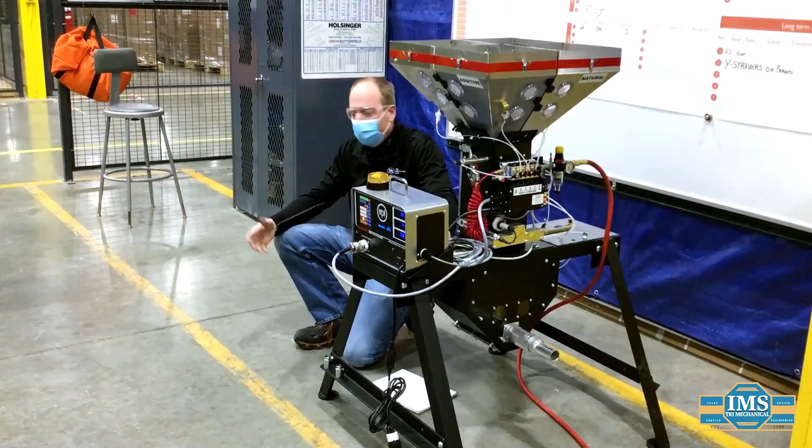Hi, my name's Rod J.R. Duff, and I am the Executive Director for Business Development for the IMS Tri-Mechanical Companies. I started as an inside sales rep in 1989 with the ambition to become a full-service plastics provider. Our company has a full design and engineering department, a full aftermarket services team, and a very energetic team of inside and outside sales professionals. I am proud to say that each of these distinct and separate departments complement each other and are managed by some of the best individuals I have ever met.

Hi, my name is Rob Williams, and I am one of the managers here at IMS Tri-Mechanical Companies. Hello, my name is Lawrence Gooding, Inside Sales Specialist for IMS Tri-Mechanical, with over 10 years of experience in the plastics extrusion industry. My name's Barbara Rodardi, and I'm an account manager with IMS Tri-Mechanical. Hi, I'm Chuck Bueller, and I'm a regional sales manager for IMS Tri-Mechanical Companies. Hi, my name is Bob McHouston, and I'm the Field and Operations Manager for IMS Tri-Mechanical.

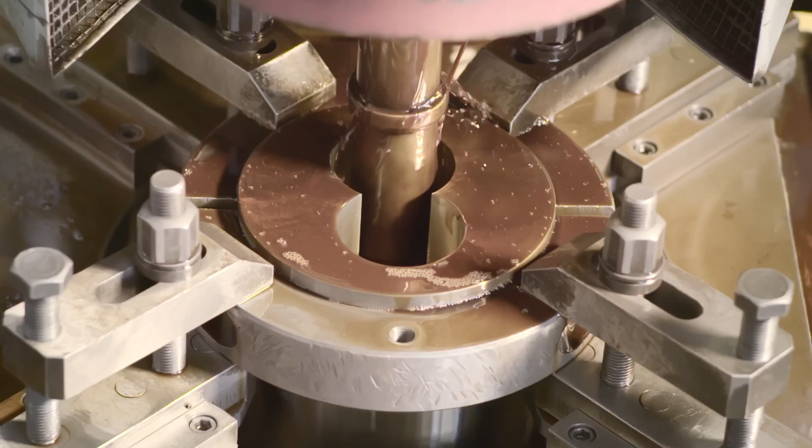Today, I'm here to talk about Bausano extrusion systems and the upcoming Bausano Open Day event. Bausano is synonymous with innovation. This is why IMS Tri-Mechanical partners with them. We offer our customers the opportunity of transforming their companies into smart factories where productivity increases and working conditions improve.

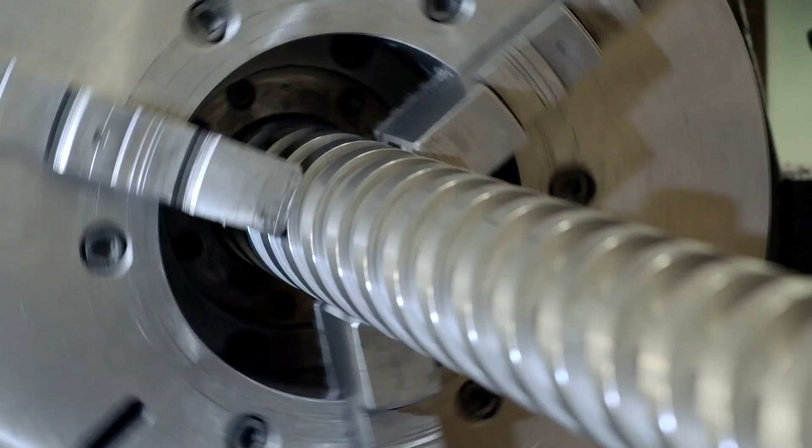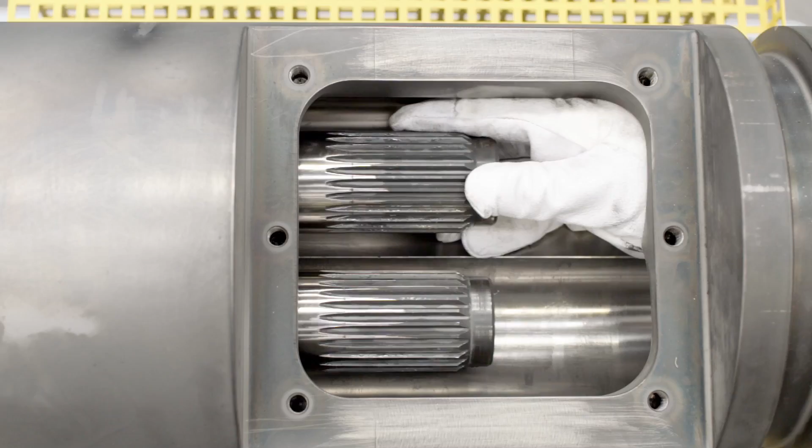Unlike other extruder manufacturers, Bausano does everything in-house. I mean everything, from component drawing and manufacturing to line assembly. Every step is managed internally by their highly skilled staff. Hi, we're here at one of the leading PVC compounders, certainly in North America. We just want to share their thoughts on Bausano extrusion systems.

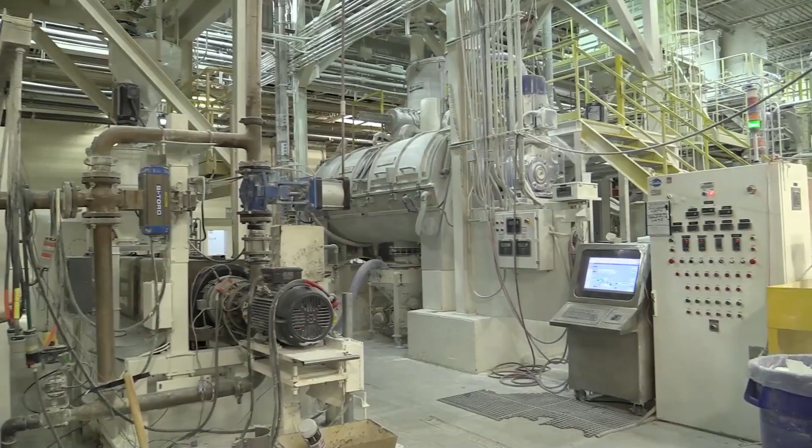Hi, my name is Nick Lynch. I'm the president and CEO of Roscom Incorporated. So in the mid to late 80s, Roscom was looking for a twin screw manufacturer so we could buy equipment from. And we went to Italy and we met with Bausano Group. Since then, we've produced over 1 billion pounds of material utilizing the Bausano extruders here at the Roscom facility. Our goal was to get to a machine that would run 1,500 pounds an hour. Bausano, with their 154 machine, has proven that we run 3,000 pounds an hour.

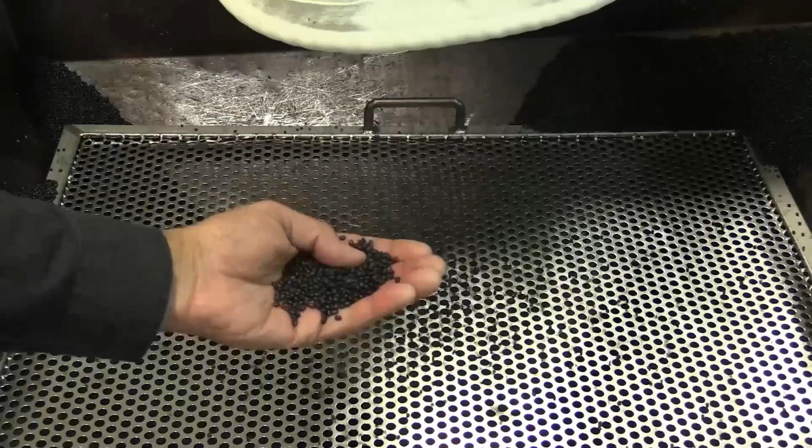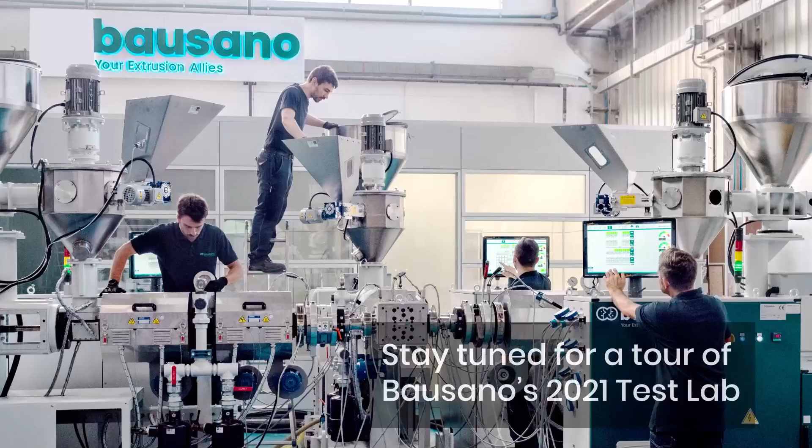So before we could actually buy a piece of equipment, we had to confirm that the material itself was going to work in our customers' locations. Bausano had a testing laboratory, a full production testing laboratory. So they allowed us to ship material. We shipped it in a dry blend form, 20,000 pounds of 4 different materials. We wanted to verify that the material coming off of those production lines would meet the quality of our customers' products. And they did.

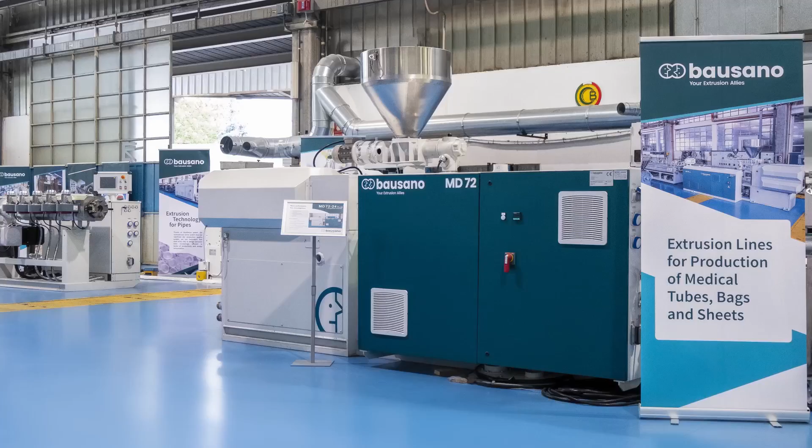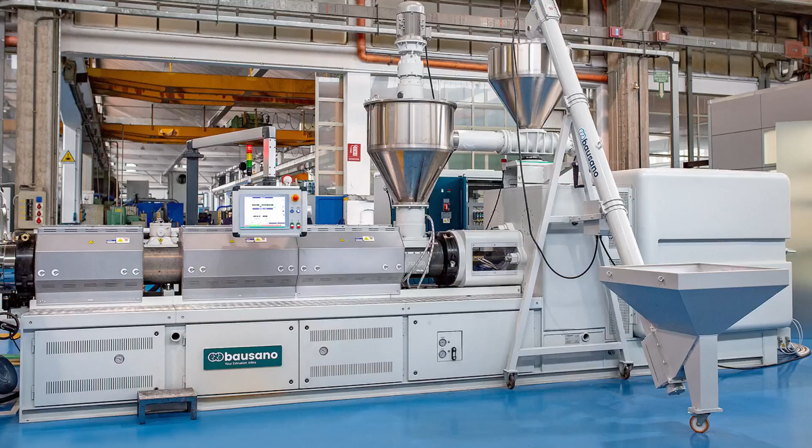As the president and CEO, I've been into so many different companies. And Bausano's was the place, and it's hard to say this and people really believe it, but you could eat off the floor. Bausano showed us this new Ford transmission gearbox, and those gearboxes, instead of going for 2 years, we were running for 5 years, 10 years. The multi-drive system has proven that it actually works. And we need that for the amount of torque that we actually put through the extruder heads to manufacture our pellets, be it flexibles or rigids.

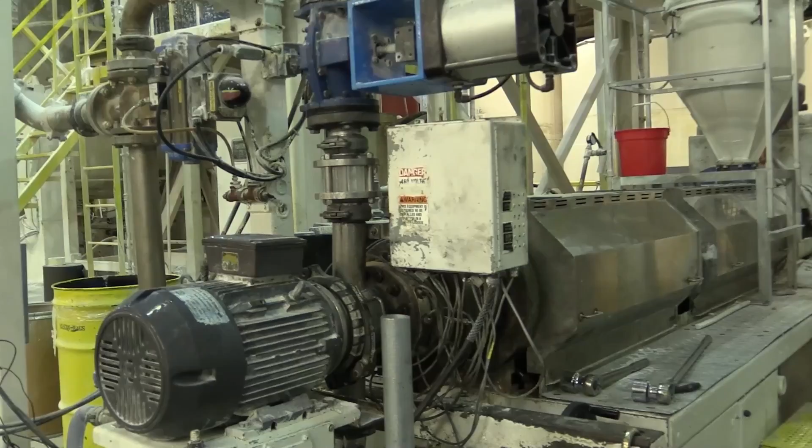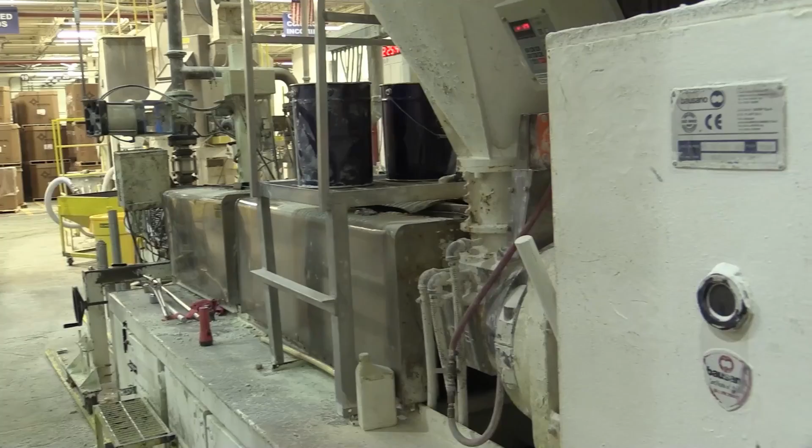I arrived at Roscom in 1996, and pretty much all but one of our 5 Bausano extruders were already in place here at that time. So we've been running them pretty steady since the day before I walked in the door. I actually love the Bausano. Back in, I'm going to say 2001, I did the install of that line. That was the 5th one that we added. We beat the hell out of them. They're bulls. They run. We never really have an issue with them, which is great.

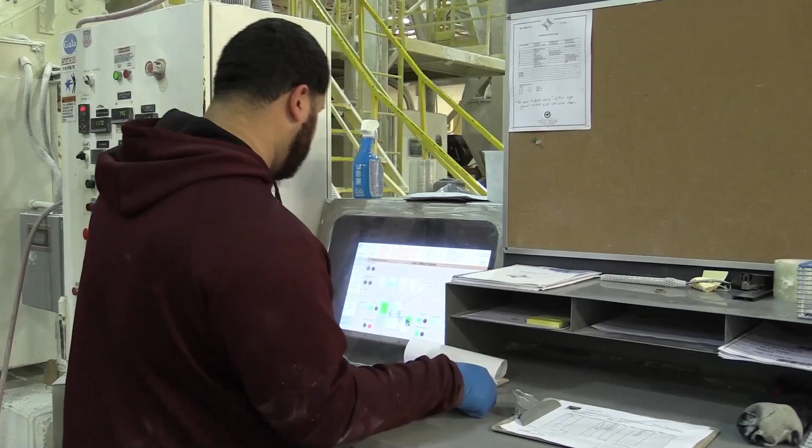As a manufacturer who runs 24 hours, 7 days a week, and we're always in somewhat of a sold-out position, the importance of having spare parts. Bausano manufactures this equipment every single day, so if we needed a transmission or we needed a gearbox, some companies here in the United States, you wait 6 to 9 months before they'll even have a product to ship you.

Bausano has been there for us right from the beginning. They have that type of inventory. Bausano's spare parts and everything, we've never really had a problem. We always go at them with an email and they're back to us in less than 24 hours worth of response. They've never dropped the ball on us at all. They've always been right there with us to work through anything, any questions.

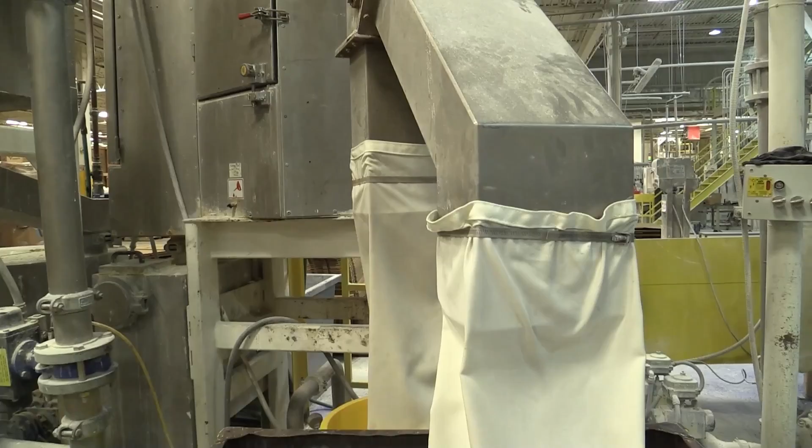Bausano itself, you can adapt various other equipment regardless of the manufacturers that we select that we want to work with. It ties in with the Bausano lines. When I talked about how clean and wonderful that plant was, and you look at all the orders and all the manufacturing, you knew Bausano was here to stay for the long run. And it's proven its point here 40 years later. They're a strong, wonderful company. They've done a great job for us.

I don't know of any other company that I personally have worked with, and I've worked with a lot of companies, I've designed a lot of plants, that the Bausano people and the equipment are state of the art. If I put another production line in from Roscom, I guarantee you it's a Bausano line.

You can go visit any manufacturer in the world, go visit them, go to the Bausano facility itself, and you make your own choices, and I guarantee you'll come back with the same feeling that I did, that you're working with a first-class world manufacturer of equipment. And that's, for me personally, seeing it and seeing other companies, you'll never regret it. It's worth the trip.

I'm not getting paid for this at all. I would never want any money. Bausano is a fantastic company, and I just wanted to spread that to anyone else that wants to listen. And I guarantee you, go visit everyone else, see Bausano, and you'll have them for life, just like Roscom.

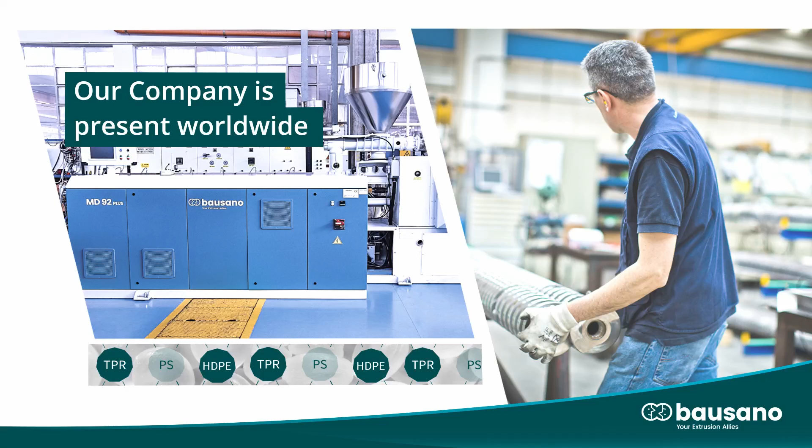And let me tell you something. A structured training program for specialized technicians is underway at the Houston and Oswego partnerships, aimed at guaranteeing qualified and prompt assistance centered around flexibility. But not only. In autumn, at the showrooms of our partners, a twin screw extrusion line will be installed to be seen and tested by any interested customer. Now I will hand over to Gianmarco to go into the details of the line that you will see in operations today.

My name is Gianmarco Palladino, and as previously mentioned by Giorgio, I'm in charge of the southern part of the US, from California up to Florida. Today I will talk about our range of products. The core product is the Twin Screw Counterrotating Extruder, used for many different kinds of applications. For the production of pelletizing and repelletizing lines for different materials, but mostly PVC. For the production of pipes, such as conduit, pressure or sewer pipes, up to medical and agricultural hoses.

In fact, over the past year, we have developed and improved a new generation of die head technology in order to provide a high-speed line where we can reach interesting output. Then, of course, we provide extrusion lines for the production of profiles, such as windows, flooring, and ceiling, even those made in WPC, so wood plastic composite.

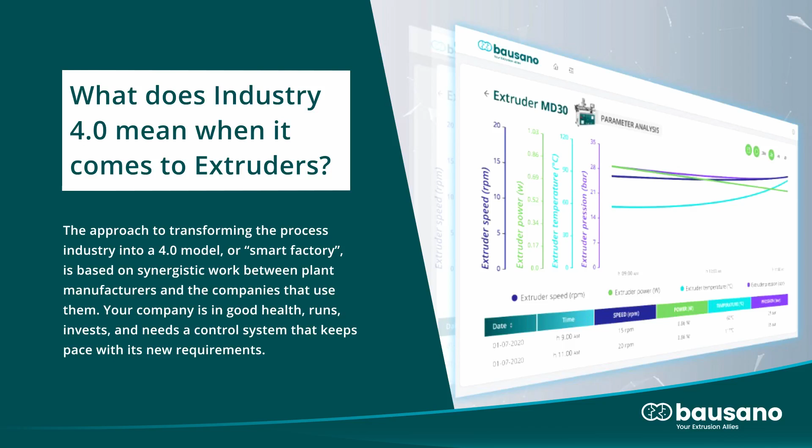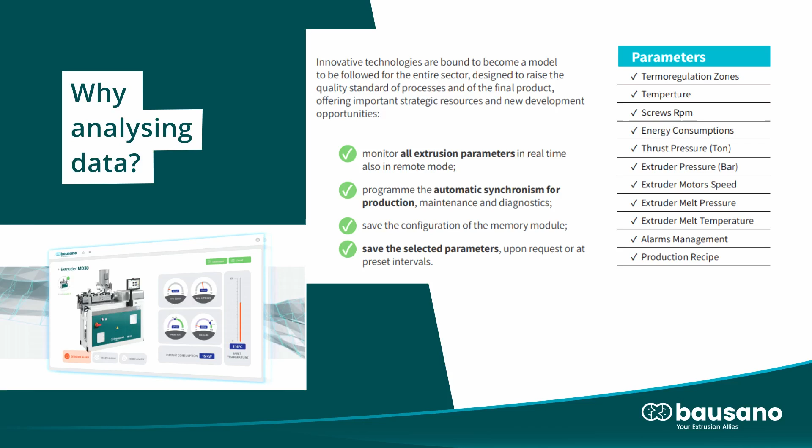So why analyze data? The integration of the IoT system and Bausano extrusion line provides a short time to market production and compatibility with existing plants. It performs continuous and real-time monitoring of production, generates immediate reports and intuitive graphs on production performance, like machinery status and waste, intelligently connects all the machines in the field and integrates them with a company management system, such as ERP or CRM, to automatically govern their startup processes, collect raw data and transform it into ready-to-use information, and have certified and correct data on which to set the analysis of its business and R&D activities.

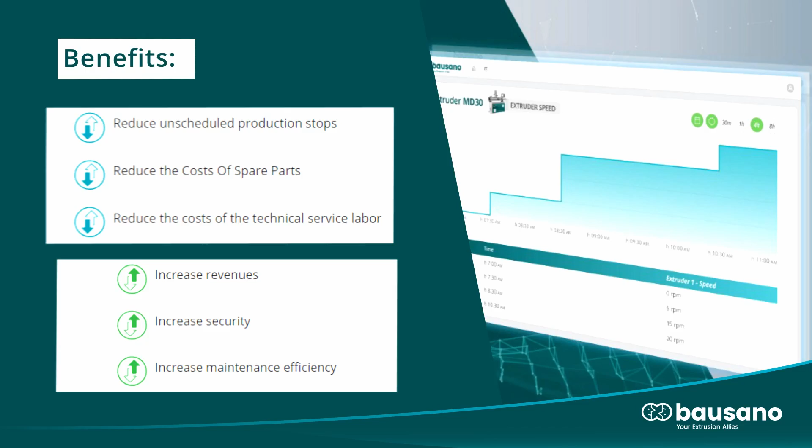This means that in the future, different machines in different places and production locations around the world can be incorporated in one single system. So now I'll hand over to Giorgio, who will explain how our smart energy saving system works. Thank you, Gianmarco.

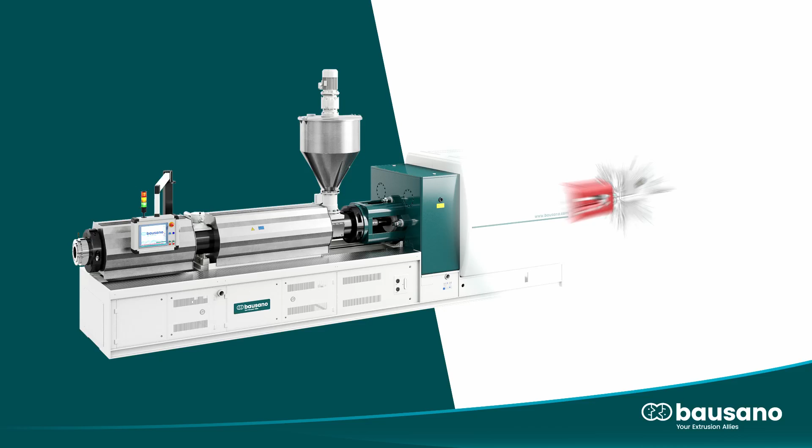Dear ladies and gentlemen, now finally we reach the heart of Bausano technologies. The great hallmark of our twin screw extruders, which was designed in the 80s and since then constantly perfected, is our Multidrive patent. The MD series twin screw extruders are in fact the only ones in the world equipped with this transmission system, which allows for the increase of the power and the resistance of the systems, as well as a reduction in

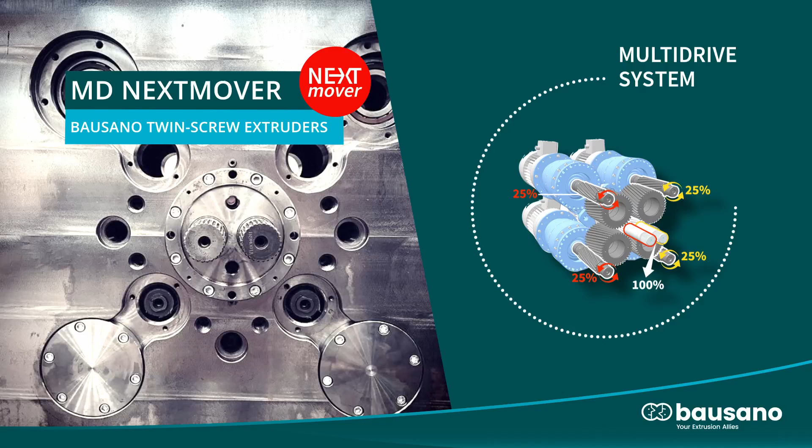energy consumption. In fact, traditional transmission systems, due to their intrinsic nature, have obvious problems of strength and space as the installed power increases. The Bausano multi-drive system, on the other hand, allows the distribution of motion on 4 different points. It increases the life of the shafts and gearbox, increasing the general reliability of the extruder. The system, with 2 intermeshing counter-rotating screws, guarantees great durability and optimal performance for any type of extrusion line.

Last but not least, the system makes it possible to reduce energy consumption with the same performance. As previously mentioned, we are extremely sensitive to this point, precisely because energy costs today represent the 3rd cost item in the financial statement, and their containment is crucial to maintaining high competitiveness on the market, provided, of course, the functionality and efficiency of the sector's production process are in no way compromised.

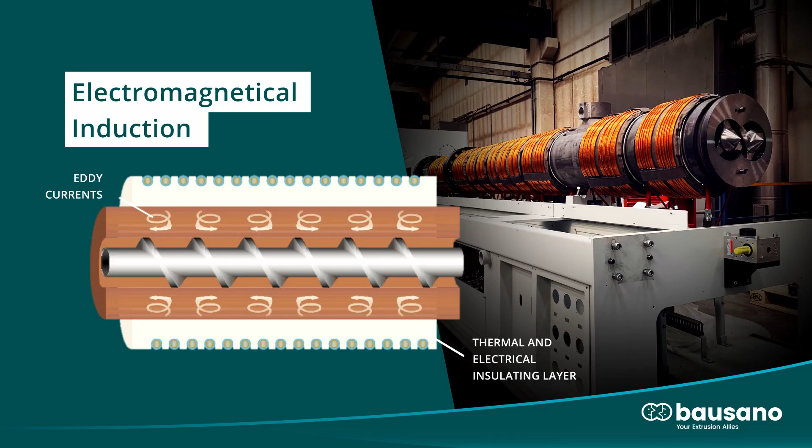The other great Bausano innovation is the smart energy system for induction heating of the barrel. This is a technological innovation that has never been proposed before in counter-rotating twin screw extruders. In the induction heating process, as you can see from the slide, the metal of the barrel is exposed to an alternating electromagnetic field generated by a current carrying coil. This non-contact process produces eddy currents in the material, which in turn produce heat.

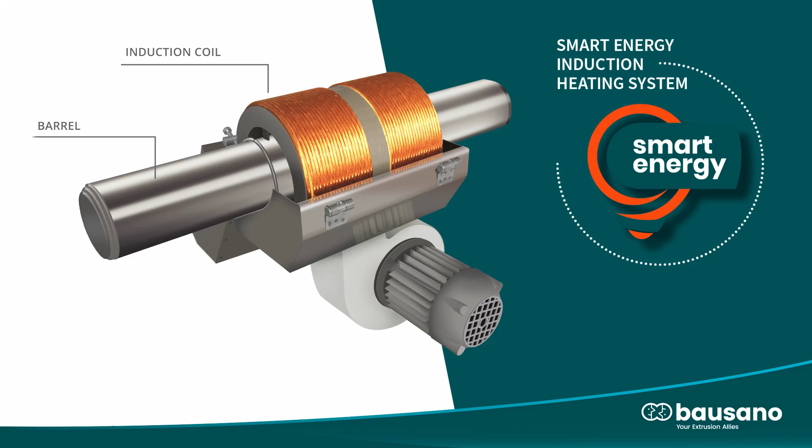The advantages of introducing the smart energy system can be summarized in the following ways. Faster heating, and maximum energy efficiency thanks to electromagnetic induction, which allows saving up to 35%. This is because the thermal energy generated by electromagnetism is not dispersed in the environment, but is concentrated inside the element to be heated, without the need for any physical contact with the element itself. The other point is the machinability of the materials at higher temperatures.

Now, if the colleagues of the test department are ready, we can get to the heart of the test, and we will see how our MD125-25 Nextmover for the production of flexible PVC compound actually works. Alessandro, are you ready? Today we are in the Bausano test room and we will show you an extrusion granulation process with our MD125-25 in the Nextmover configuration. It's a big pleasure to show you the whole configuration of the line.

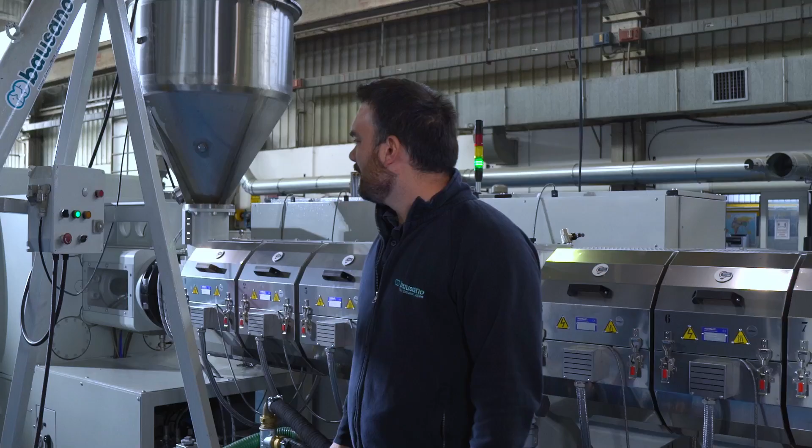We can start from the rear of the extruder, where we have 4 motors, 30 kilowatts each, all commanded by inverter directly linked to our main PLC. In the middle of the motors, we have a load cell that directly measures the thrust bearing pressure that is displayed on our PLC. Then we have the drive system, our multi-drive system already shown by my colleagues. It's all housed in our cast iron casing.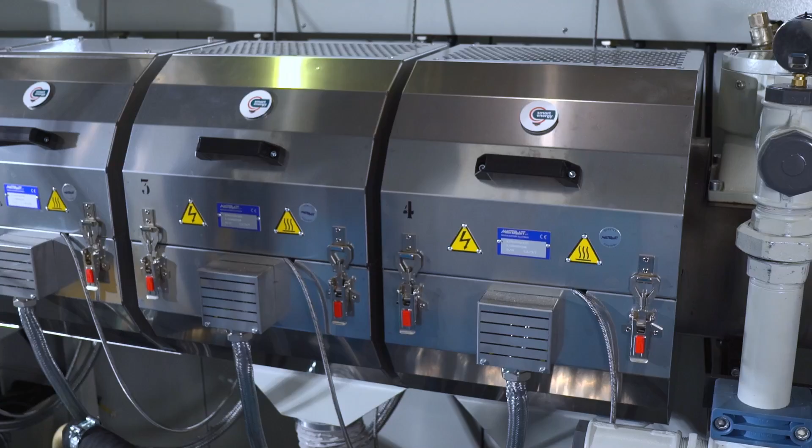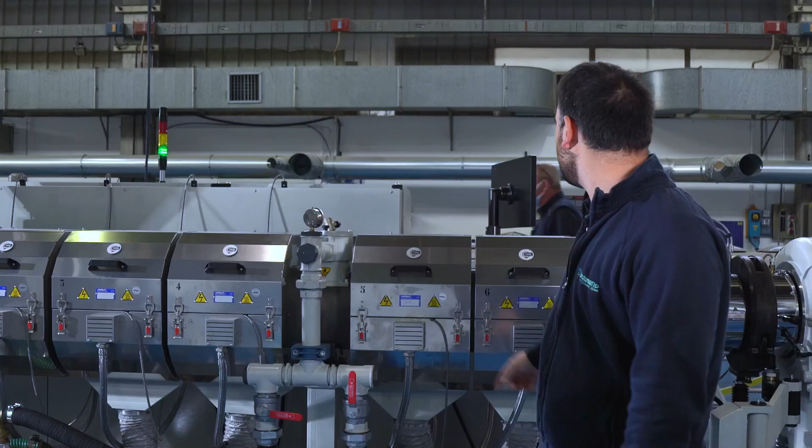After the drive system, we have the loading system of the extruder. We have a vertical conveyor moved by a 3 kilowatt motor commanded by inverter. From the vertical screw, the material is loaded directly on the feeding zone of the screws of the extruder. Then we have the barrel. The barrel is all made in nitrided steel. It's heated by induction heaters with different installed power, starting from 15 kilowatts up to 12 kilowatts, and then 4.5 kilowatts.

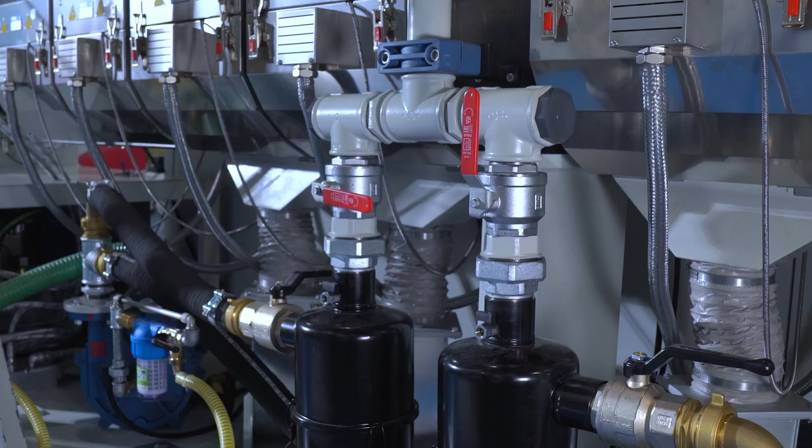At approximately 2/3 of the barrel, we have the degassing system. That is composed of the degassing window that is directly connected to 2 condensation barrels here, in which it's possible to clean and start again with the degassing process without stopping the extrusion process. This is the reason why we have 2 condensate barrels. The barrels are directly linked to a water ring pump of 4 kilowatts and 120 cubic meters per hour.

The barrel is cooled down by cooling fans. Inside the barrel, we have a couple of twin counter-rotating screws that are configured for the optimization of the process that we are showing you now. There is the compounding of flexible PVC. The screws are internally cooled by silicone oil in order to optimize the cooling of the screws.

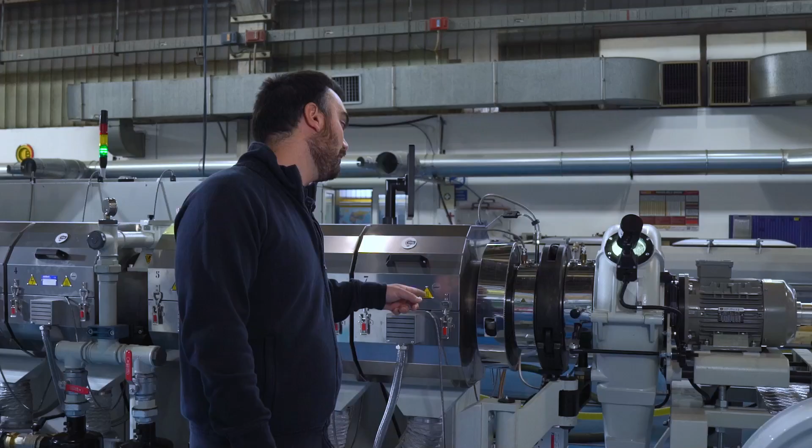Here I show you the die of the granulator. The die is heated by 3 heaters of 2.5 and 3 kilowatts as installed power. There is a manual lifting system with a triple clamp that easily allows the blockage of the die on the edge of the barrel.

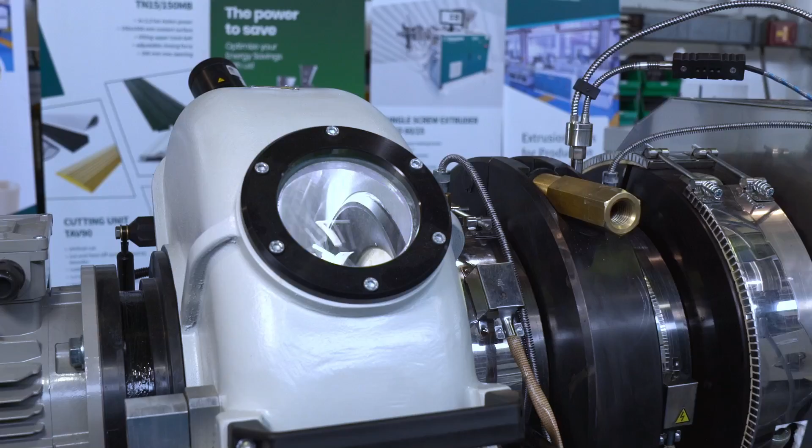The granulator die is composed of 4 rows of holes with a diameter of 3 millimeters each. At the rear of the granulator die, we have an ogive that allows to optimize the distribution of the material coming from the tips of the screw and going inside the holes of the die.

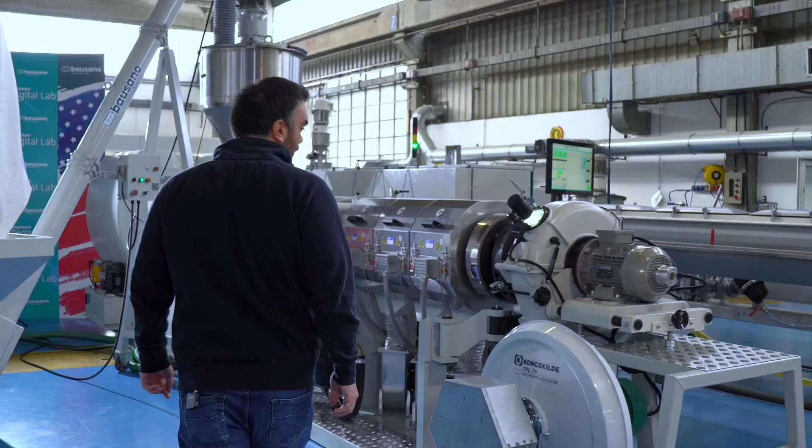Then here we have the cutting system. All the cutting system is installed on a couple of rails that allow an easy assembling and disassembling of the die and the cutter. The cutter is composed of 3 blades that are assembled on a floating head that allows to provide a uniform pressure on the die and also a uniform granule dimension. The cover of the cutter allows the optimization of the internal cooling air circulation.

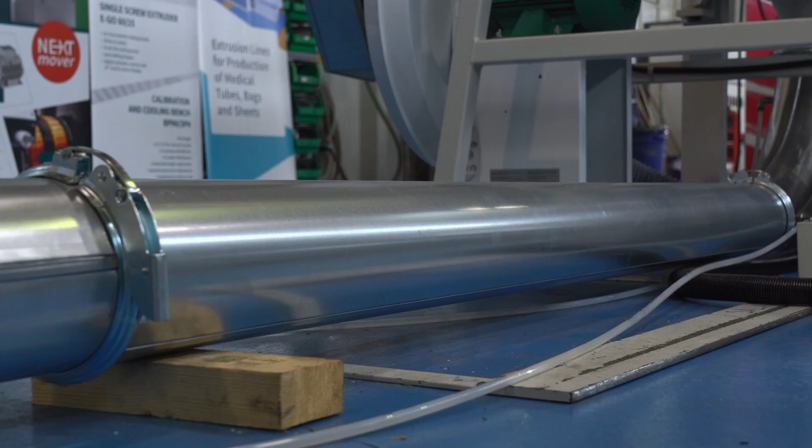The granules fall down and are launched up to the cyclone of the cooler through this launcher of the granules, that is moved by a 4 kilowatt motor. The granules are launched inside this pipe, which is jacketed with water circulation inside in order to optimize the cooling of the granules that are launched up to the cyclone.

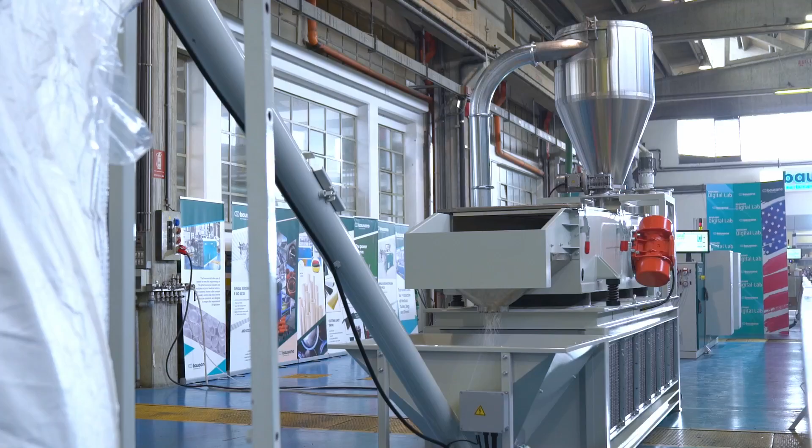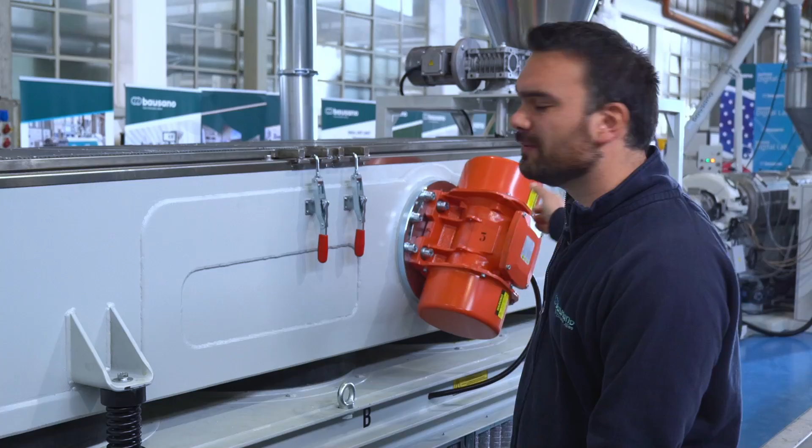On the bottom of the cyclone we have a filter. Then the granules are directly taken on the vibrating tray of the cooler. The vibrating tray is hollow and has got the cooling air, whose speed can be easily adjusted on the small panel by inverter.

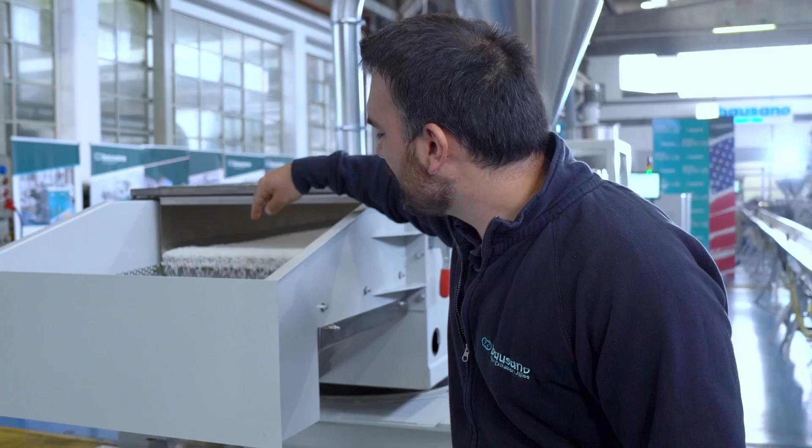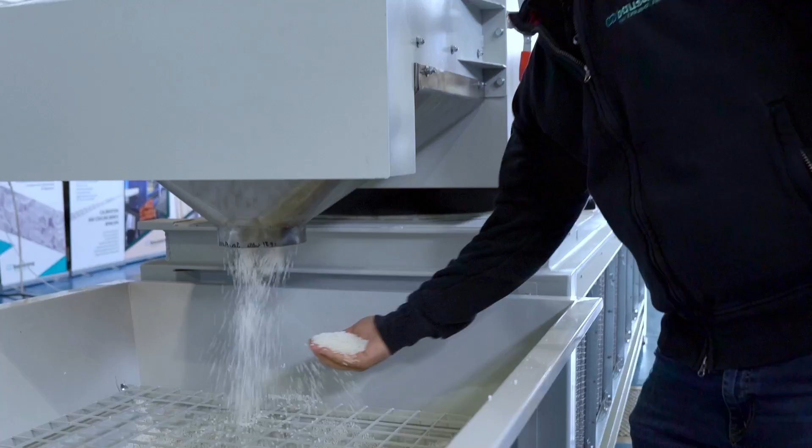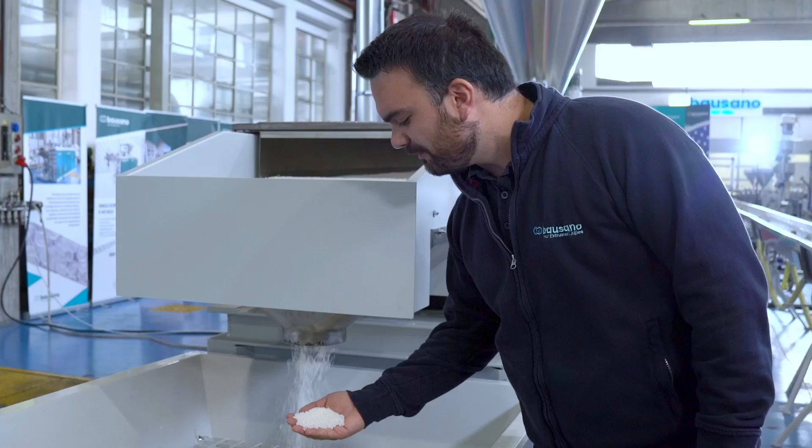The granules fall down on the cooler exit. Here we have a system of different trays with different holes in order to make a selection of granules according to the granule size. As you can see, the granules that we are producing now are very good quality with a very good gelation degree.

Now I show you our PLC, our Extrusion Digital Control 4.0. As you can see on the main page, now we are running at a very good output in terms of kilograms per hour, 1,200 kilograms per hour of very good quality PVC granules.

The main feature of this control is that it's all made with Industry 4.0 in order to allow to monitor all the extrusion process parameters in terms of temperatures, extrusion speeds, amperage, and also all the energy consumption of the line in real time by remote, maybe by PC, tablet, or smartphone.

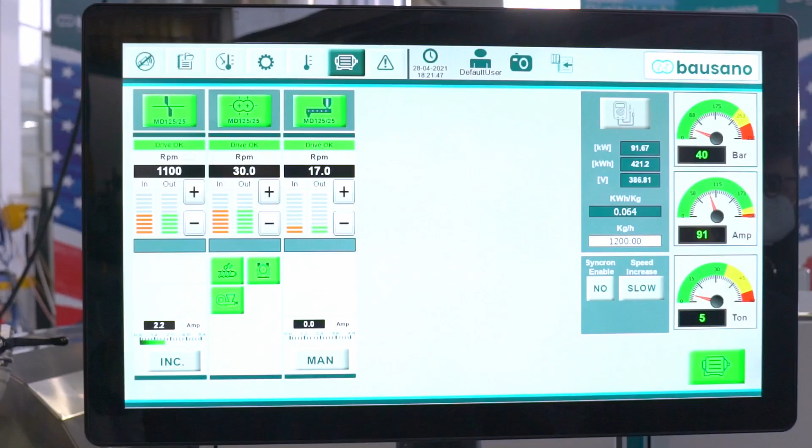On the main page, the motor page, we have all the motor speed and amperage, the pressure on the thrust bearing, and the speed of the extruder screws and of the doser conveyor, also with the torque on the doser. And they all can be set and monitored on this main page.

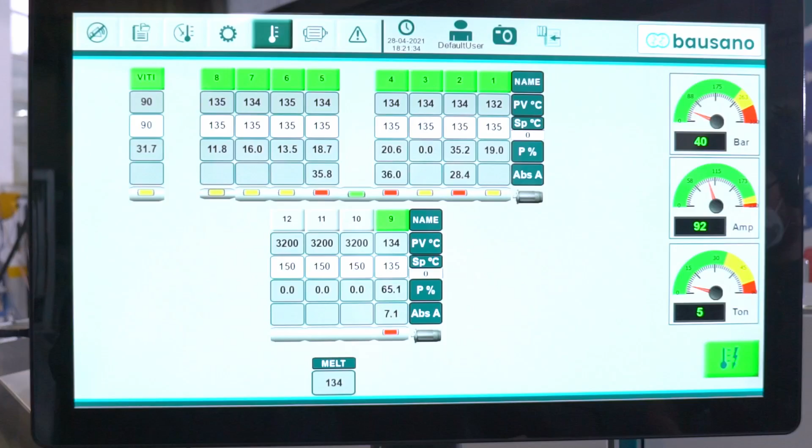The second page is the temperature page, in which we have displayed all the set temperatures of the barrel, the set temperature of the die, the real temperature of the barrel and die measured in real time by thermocouples, the melt temperature and the pressure of the melt inside the die. They are directly measured through our temperature and pressure sensor inside the collector of the die.

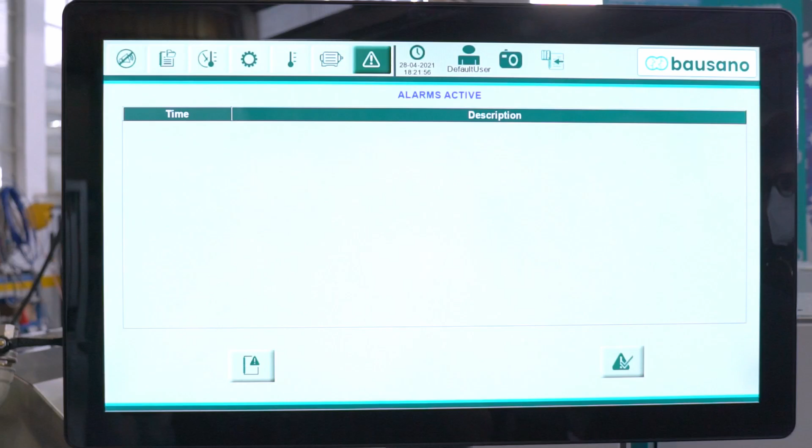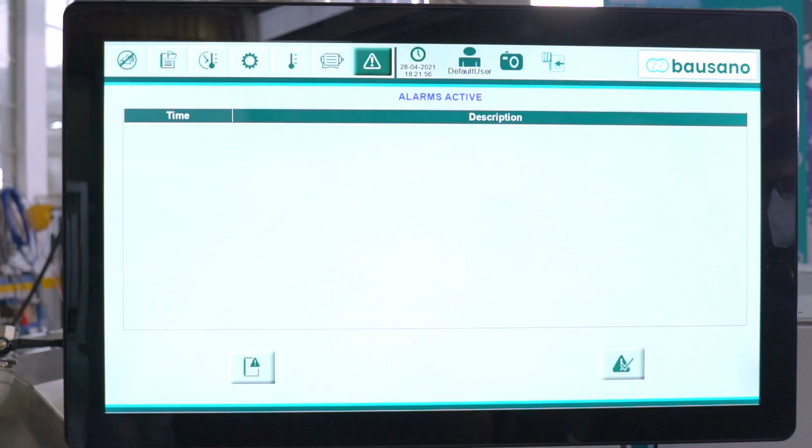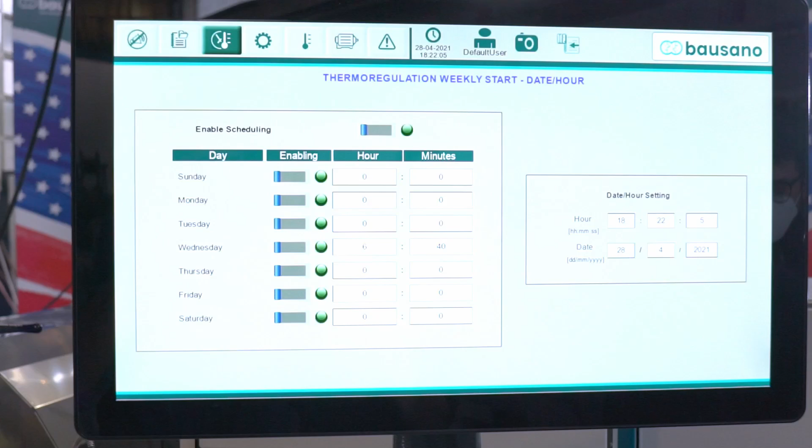Then we can switch to the maintenance page, in which we have both active alarms and the maintenance program indications that come out every time some action is needed for programmed maintenance of the extruder. Then we can also switch to the programming page, in which it's possible to schedule the switch-on of heaters at a certain programmed time in order to optimize the preheating times of the extruder.